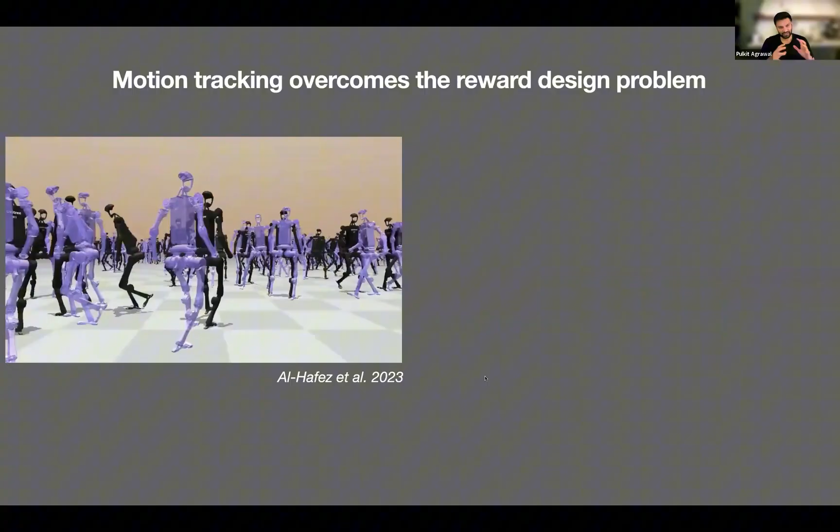So typically, training humanoids is much more involved. It requires a lot more work in designing the reward function and setting up the environments. So what people have been doing is relying on motion tracking. So over here, what you see is this purple humanoid or the purple target, which the black humanoid has to match. And these humanoids are being trained to do motion imitation. And this is how state-of-the-art humanoid systems today, for example, this video from Unitree, is powered.

So on the surface, this looks great, that there is so much we can do if we were to track positions and let humanoids follow these positions. But let's take a reality check. When we actually put these robots in the real world, and I think one question you might ask yourself is, why are there all these humanoid videos where there are no humans around, humanoids just in isolation?

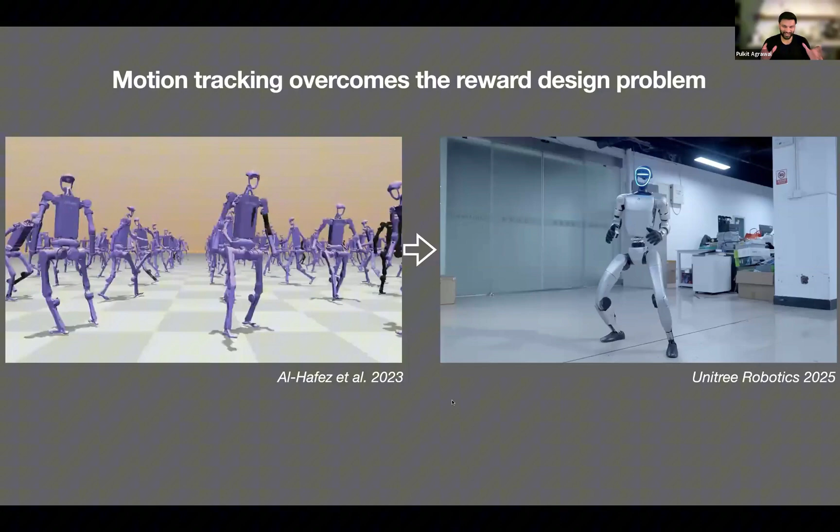And one of the big things is whether these humanoids are able to deal with the contacts that they're making with the world. For example, if the motion target is to spread your hands, as a human, if you hit an obstacle, you'll be fine. Nothing bad is going to happen. But for a humanoid, if it does that, it struggles.

Right? Here's another example where there's a motion reference to go lift something and come up. It's lifting something which is probably a bit thin. But when you give something much thicker to lift, this humanoid really becomes unstable. And the reason why these things are happening is because the humanoid has been trained really to follow the exact positions. It doesn't know what to do when there's a contact which is being made with the environment.

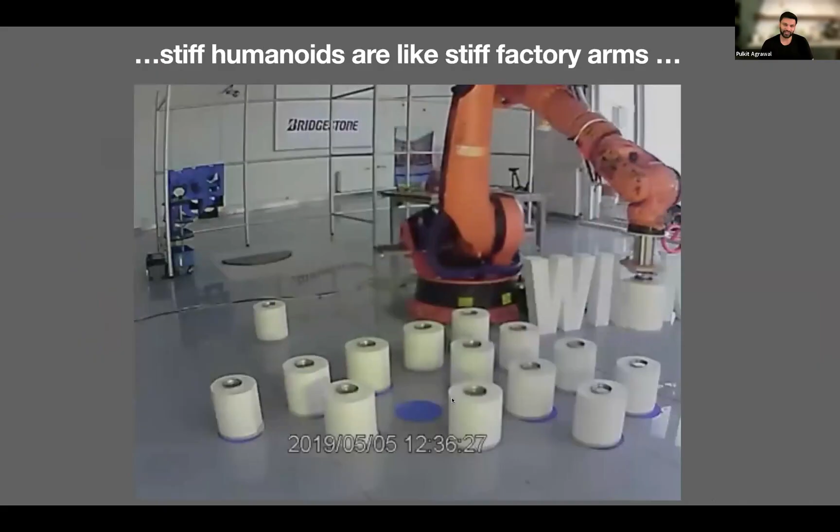So in some ways, we are training these robots like stiff factory arms. We really want them to follow a sequence of positions. And this position following is a very, very vision-centric view of looking at robots. Now, the real world or the physical world is physical because of forces, F = ma. And that's what we want these robots to be aware of: how do they apply forces in the real world, and not just in what position they should move.

So what we did in this work, SoftMimic, is to let robots learn how to apply forces and how to react to forces. So what you find is these robots can be very compliant, so they can deviate quite a lot from their motion references, really thinking in terms of forces instead of thinking in terms of positions, and taking the motion reference more as a reference instead of literally trying to copy it, right? And this is work done by Gabe and Michelle in our lab.

So here are some illustrations of what happens when you have a reference motion, but you have something which is super stiff, versus something which is much more force aware. It adapts to this new scenario. Here's another example, where the robot is bending, but in the process of bending, if it encounters a box, it will become unstable, versus a robot which is force aware doesn't end up doing this.

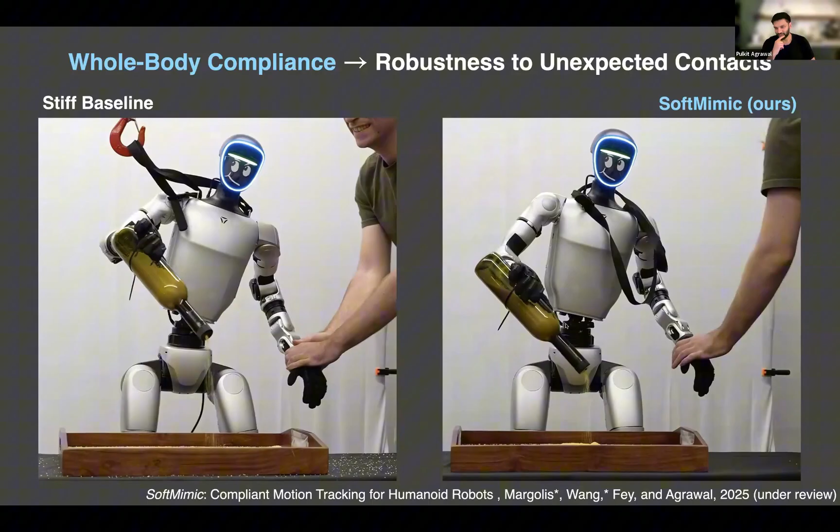Here's one more illustration where the robot is pouring something from a bottle. And if you shake it, the robot also suffers. Versus when the robot is thinking in terms of forces, things are different. Even though we are disturbing one part of the body, the other part of the body keeps on doing the same action. It's almost unaffected by what's happening on the other side.

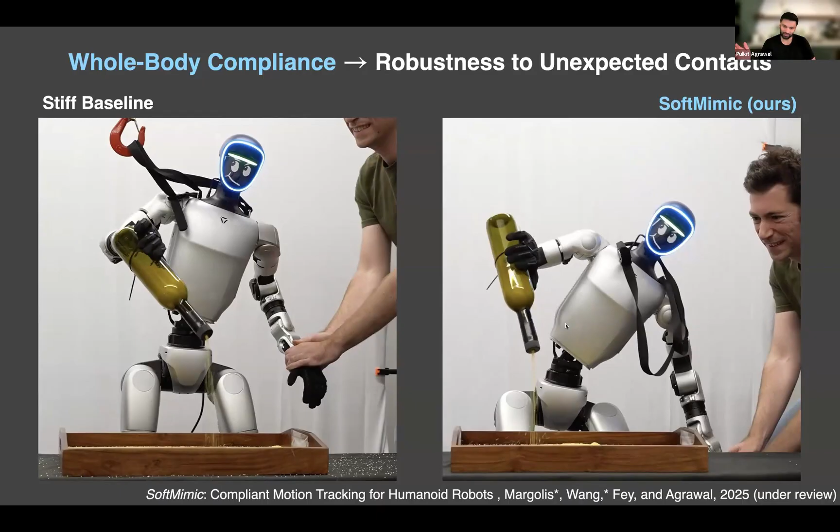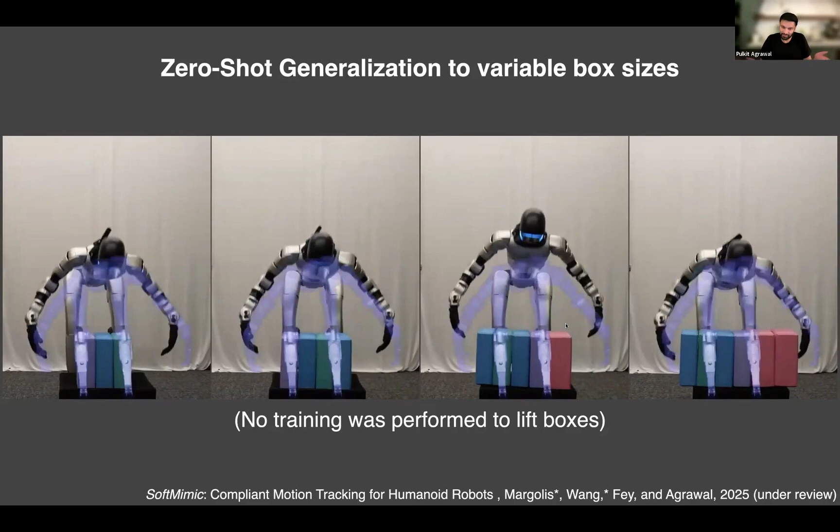Similarly, we can take a single motion reference and we can really give the robot these many different size boxes without requiring any training. And this robot is able to comply and pick up these boxes of different sizes. And this is again happening because it's thinking in terms of forces and not positions. It's not trying to match the position of a motion reference. It's not trying to necessarily detect where exactly the box is. It's trying to figure out, hey, where do I apply force? If I see force resistance, then it means that I have touched the object. I should just lift it up.

Here is another example where we train the robot only to walk in free space, and then without doing any additional training, we can apply an additional load. For example, putting something heavy on a chair, and there was no training done or no domain randomization done to enable the robot to deal with this scenario, or when a human is interacting with a robot, right? The robot again complies very naturally because it's been trained to think in terms of forces, or to act in terms of forces instead of positions.

Right? So the one thing which I want to communicate is I do think a lot of current robotic systems are built with this idea of position intelligence, where the robot control is about going to a particular set of positions.

And this is really deeply rooted in the idea that we want to do visual motor control, where we take vision as input and try to output positions. But I think to interact in the physical world, what we are learning from everything that we have seen in quadrupeds and humanoids and legged robots is that we should really be thinking in terms of sensing forces and applying forces, because forces is the language of physical interactions.

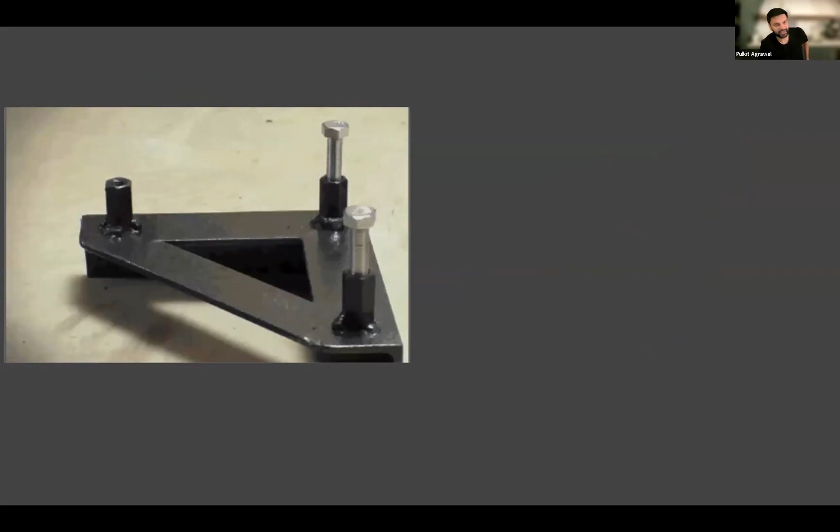Now, why would you care about force intelligence and manipulation? So here's an example. Suppose we want a robot to go in and put in a screw in the slot shown on the top left. Now, if you're thinking in terms of positions, what you would do is you would try to get a screw, align it perfectly to where the screw goes in, and then try to move the hand down.

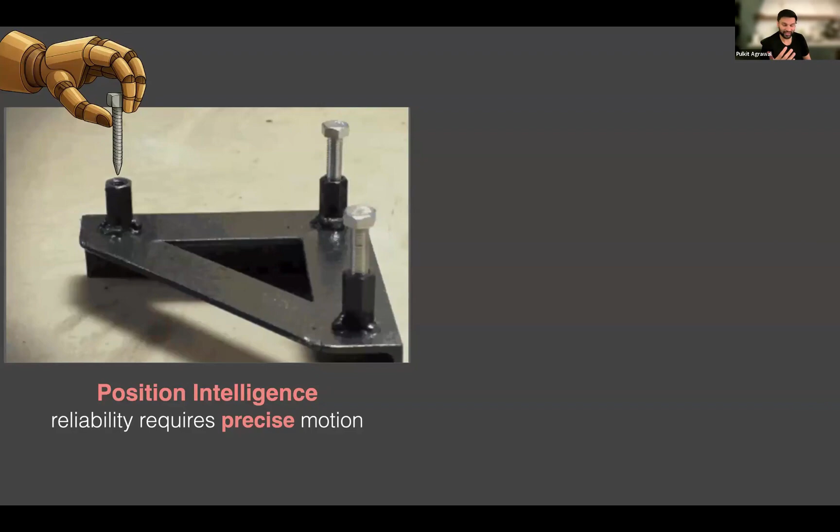Now, think about this, right? If you really want your neural network to predict at a millimeter level, sub-millimeter level, this will require tons and tons of training data. We all know scaling laws in machine learning, which say that to reduce the error linearly, you need exponentially more data. So this is going to be very expensive and hard to do.

Versus if you look at what a human is doing, the human is doing nothing which looks like position intelligence, right? It hits the boundary, it reacts to the boundary, the screw movement is quite clumsy, yet you're very reliable at performing the task, right? So force intelligence can help you get reliability without really being precise. And I do think this is something very powerful. And it scales with how machine learning scales. You don't require exponential amounts of data to be able to perform these tasks as a human. So what if robots could also start doing this?

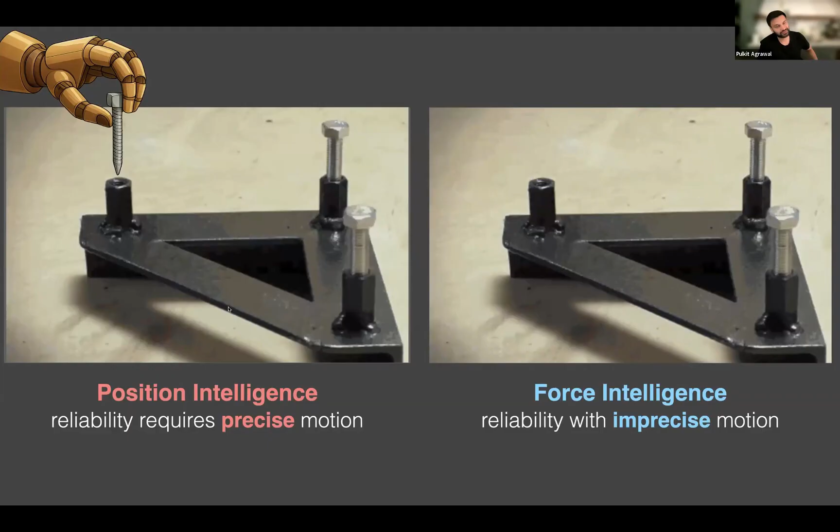So why is this harder to do in manipulation than it is to do in locomotion? And really, it all boils down to the fact that a humanoid or a legged robot is running on Earth, and Earth doesn't move. It's really, really heavy compared to the weight or the inertia of the legged robot. But once it comes down to manipulation, things are quite different. The hand is typically much heavier as opposed to the object. So if the hand makes a small mistake, the object is going to fly out, right? Just because the object is so much lighter than the hand. And this ends up really being the core problem, right?

And to illustrate this, I like this visualization where imagine if you had to move a chair or if you had to move a strawberry and then you had a truck to move it. What's going to happen? It's going to be really hard to control it. And this is really what's happening in manipulation today. We're using very, very heavy hands to control things which are very, very light, right? And the question which really comes down is, can we make these hands lighter? If we can, then things are going to be different.

But then if you try to make hands lighter, you might say, hey, I can use motors which are lighter. But then light motors also have less power, and that really creates a problem. So what do we do? So the one thing that we have been exploring is, how do you make the system be light? One thing is, well, let me not have so many motors to begin with. So why don't we minimize the number of degrees of freedom, right?

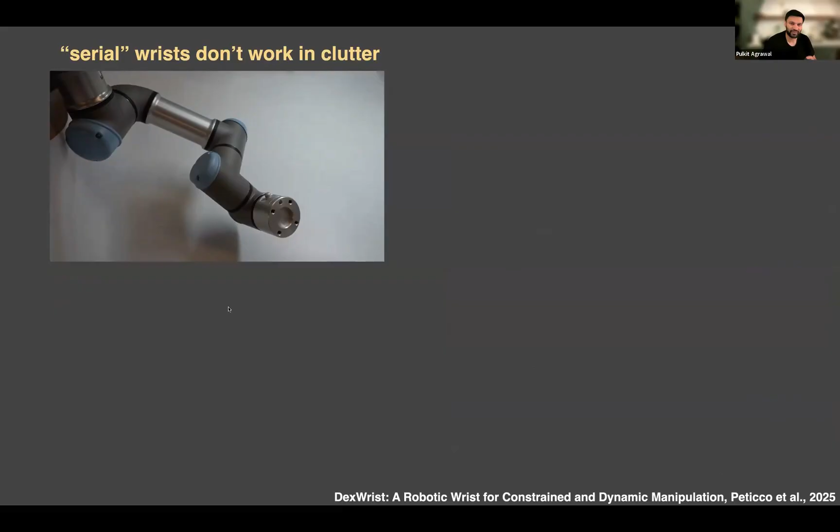I have more slides showing this quantitatively. If you're interested, I'd highly recommend reading this paper. But in interest of time, the main takeaway is that a two DOF wrist and a simple gripper can be very powerful. But if you look at the wrists we have in robotics today, they're not that good. There's a UR arm, you can look at the Franka and many other arms - even to make a small motion, these robots have to move so much. This is because these wrists don't have joints which are co-located, but joints which come in a series. Further, these wrists are also really, really stiff.

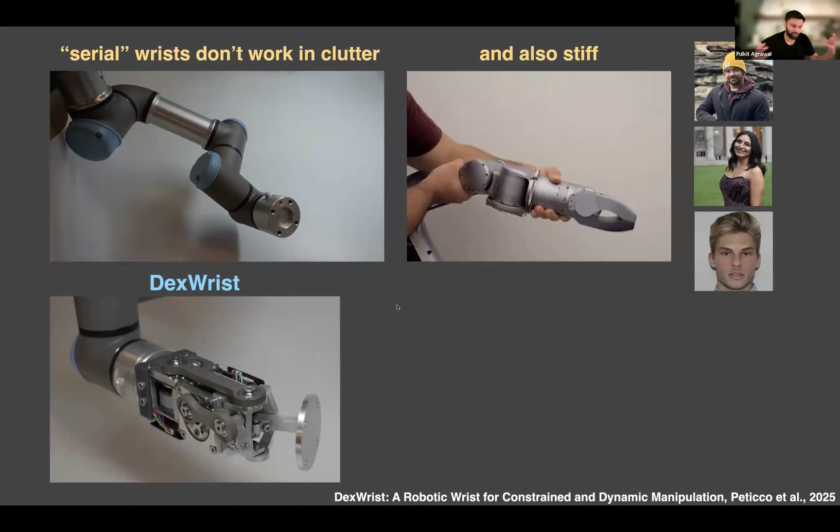So what some students in the lab did is they made this thing DexWrist. DexWrist has joints located at a single location, which means it can move much more easily in clutter. It's also built to react to applied forces, and it can move quite fast.

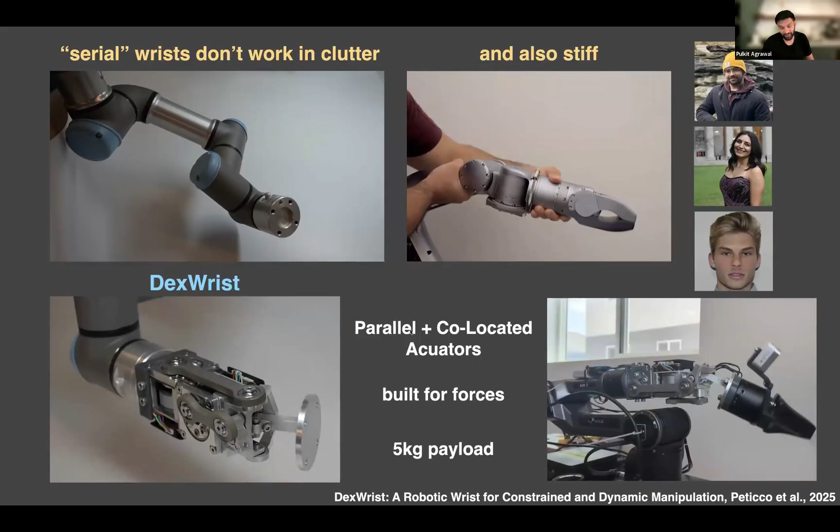As an example of the DexWrist, showing how dynamic it can be - this is a pre-programmed behavior.

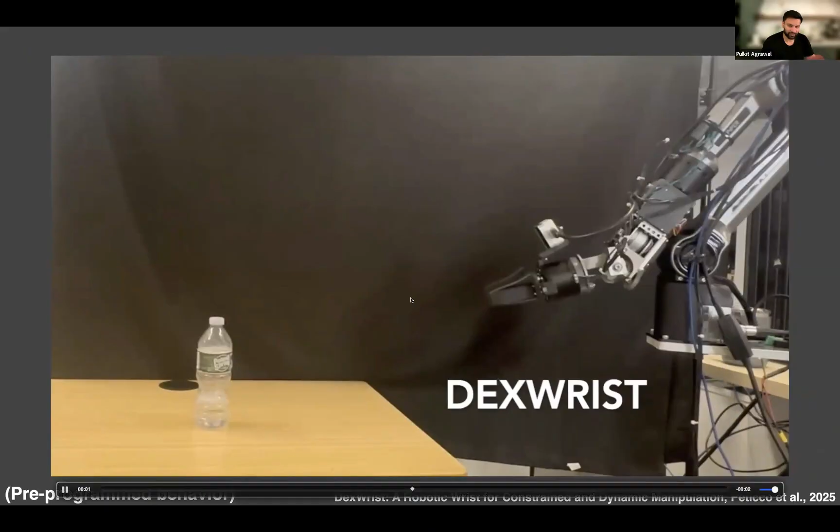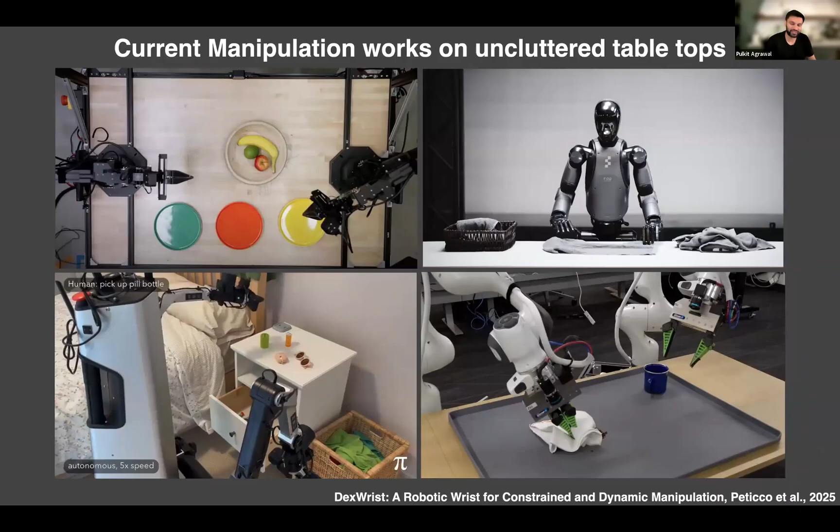The other thing you might have seen is that a lot of manipulation videos today are happening on really uncluttered tabletops with a few objects. Our households look very different from this.

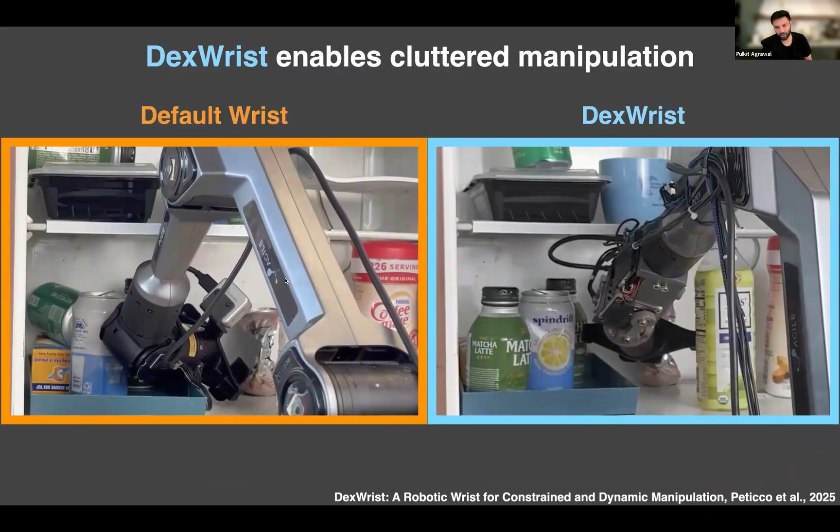Here is a comparison between what a default wrist and the dex wrist does. Default wrist on the left in orange, dex wrist on the right. What you find is, because of this parallel joint issue, the dexterous wrist can go into really small spaces and bring out this crushed piece of a drink, versus if you don't have a parallel wrist, you can't really go into these cluttered spaces.

Here's again a comparison doing wiping - by having this force compliant wrist, you can do things like wiping much faster. You get some generalization for free as the person is really moving this whiteboard while the wrist is wiping.

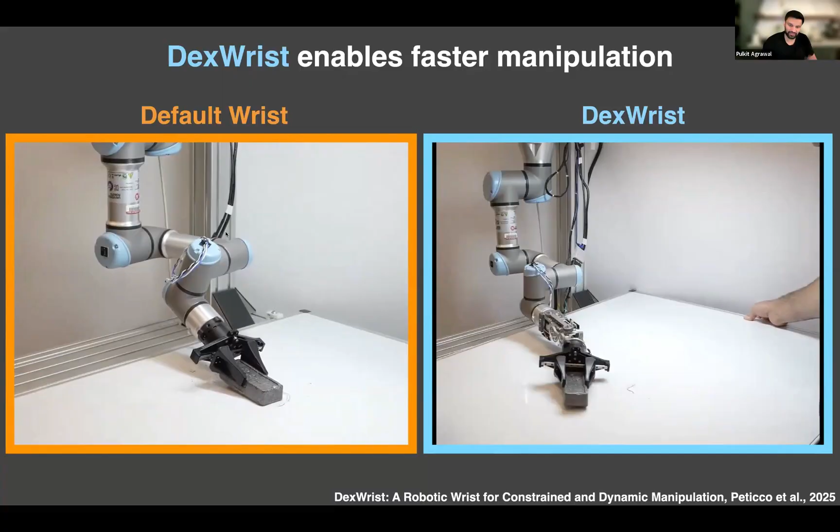What we also found is, if you use the wrist, the length of your trajectories is much shorter because you can move much more easily. So if you're collecting data, you can collect much more data. If you're doing learning, the advantage of shorter trajectories is it also increases your success rate, because now you need to plan or output fewer actions, which is always good for machine learning.

So the first thing we can try is to be minimal, trying to reduce the inertia of the overall system. What I showed you is that the wrist does this successfully. It's something which just improves machine learning for free, and it also allows robots to function in constrained environments.

But if you really want to do more delicate things and still be fast, I think you want to be minimal, but not too minimal. This is where we have been exploring how to construct robotic hands which are force aware, really applying this philosophy of force intelligence.

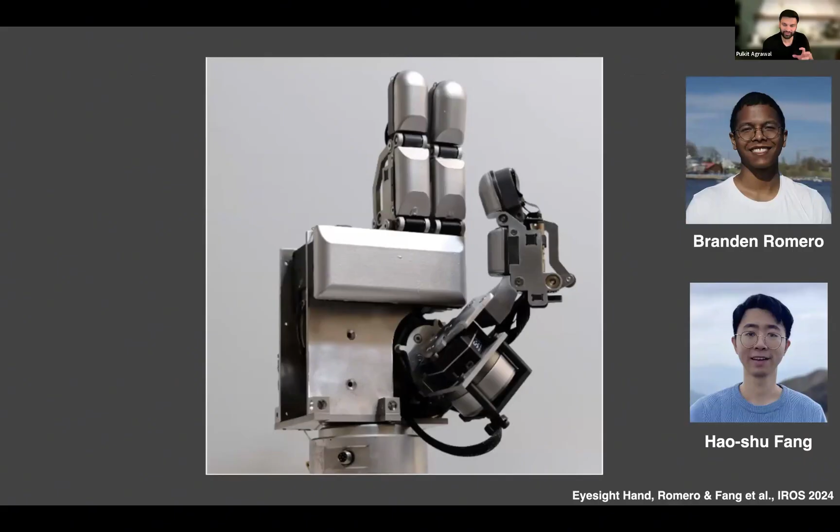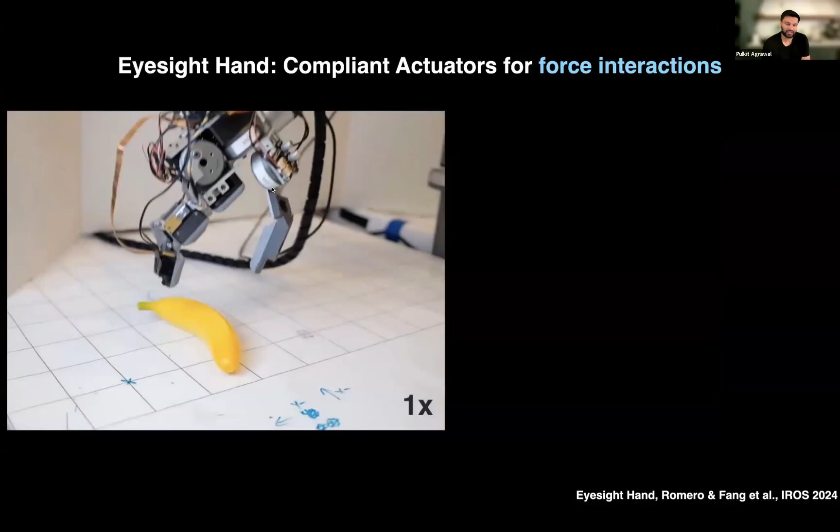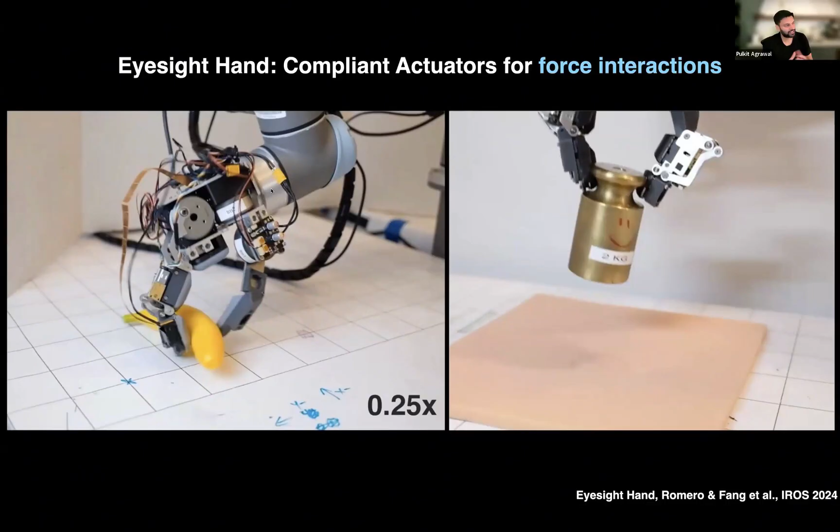This is work done by Branden and Hao Shu. This is our eyesight hand. This hand is quite fast. It's built for dealing with contacts with the world, while still retaining enough power so that it can lift regular day-to-day things. Some humans can do pull-ups with two fingers - that's amazing, that's crazy, but we really don't need robots to do all of that.

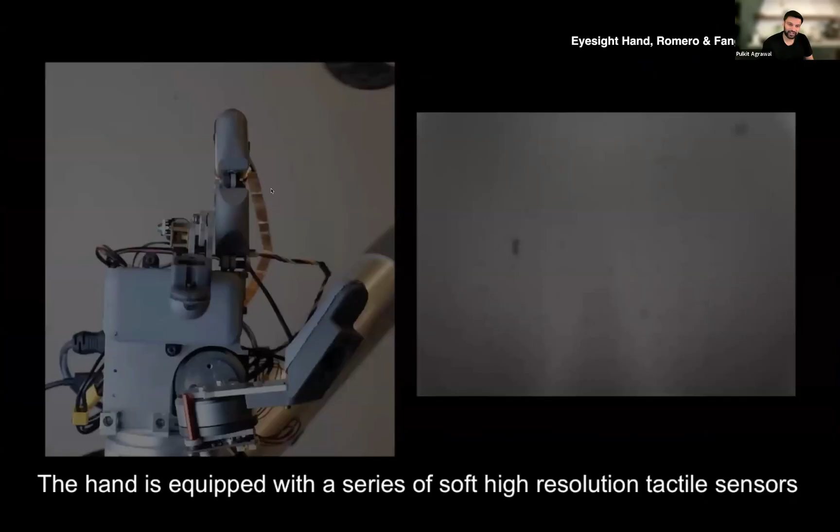These hands are covered in GelSight sensors, so they are capable of doing fine grained tactile sensing. I'm going to skip this in interest of time.

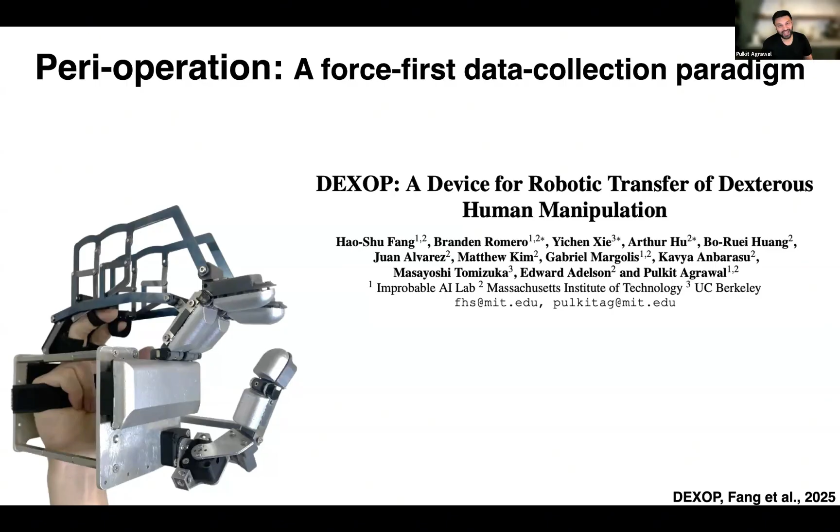Next, what we did was take this eyesight hand and convert it into a device called DEXOP, which enables humans to control this multi-fingered hand so you can go and collect data, but really in a force-centric mechanism. What I mean is, if you're doing teleop, you almost never get force feedback to control the robot. Here, because there are linkages mechanically connecting the human fingers and the robot fingers, the human gets force feedback, at least at the joint level, as it is interacting with the physical world.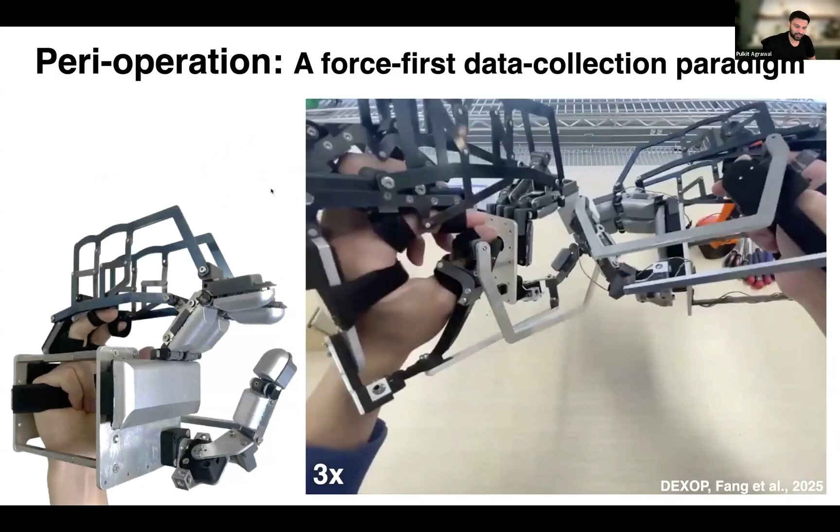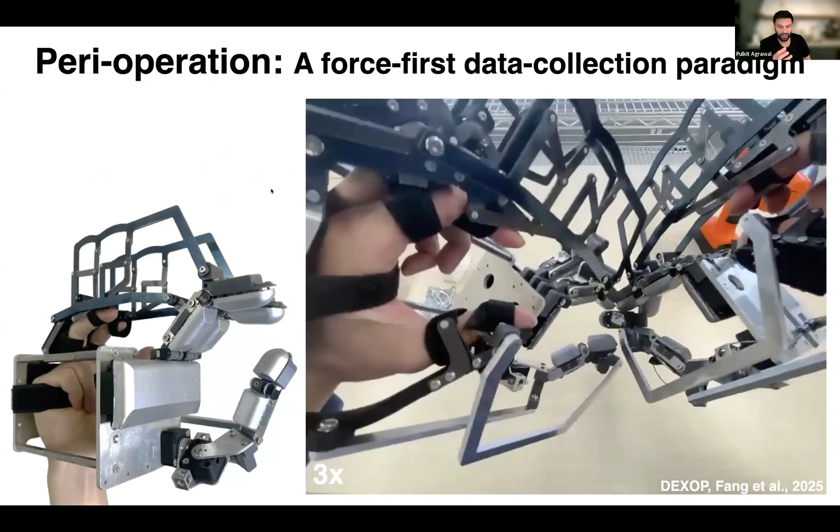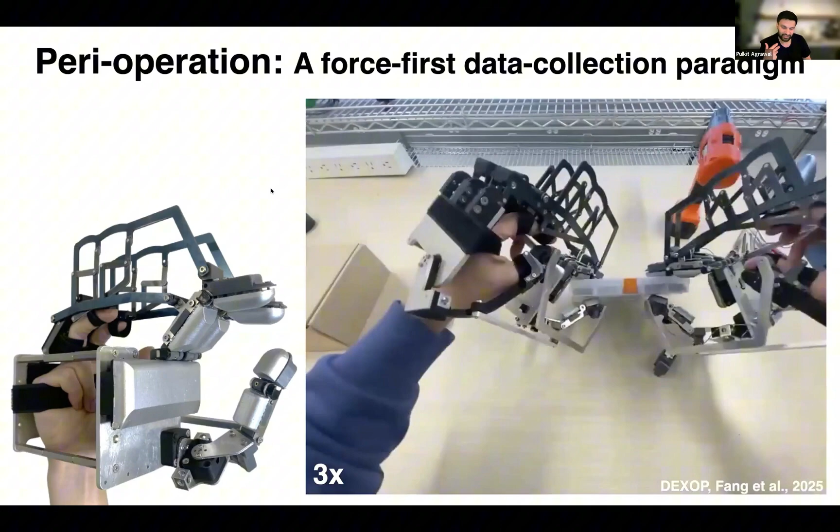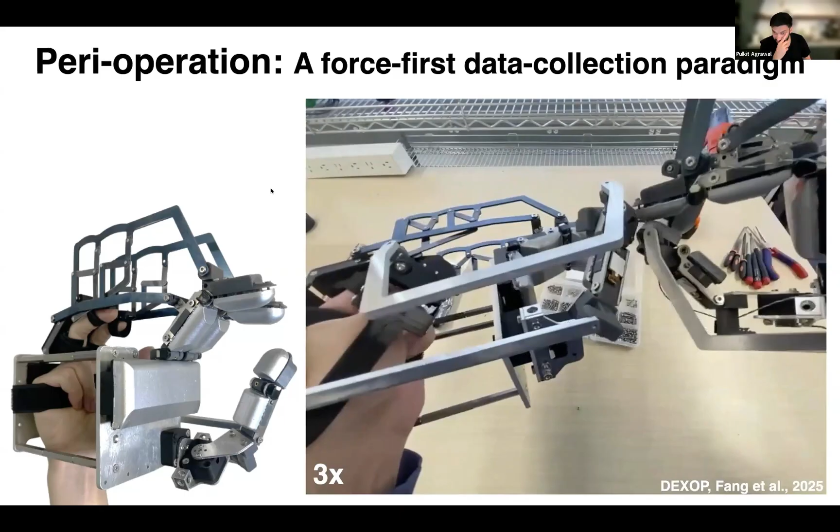The hand is covered in tactile sensing, so we can record that data. We can also record the joint positions. This is illustrating Dexop in action, where we are performing an assembly task. Over here, we are trying to assemble the hand itself. This illustrates the kind of things one could do with Dexop while recording not just vision, but also all the force interactions happening as the hand performs this assembly task, which involves manipulating really small objects, like this screw, and using tools with a single hand because the other hand is already holding something.

This is how learning with Dexop looks like. We're calling this paradigm peri-operation, instead of teleoperation. Peri means something close, and our interpretation is that because it's close, we can transmit forces, we can feel forces, and that's the benefit that comes from being close.

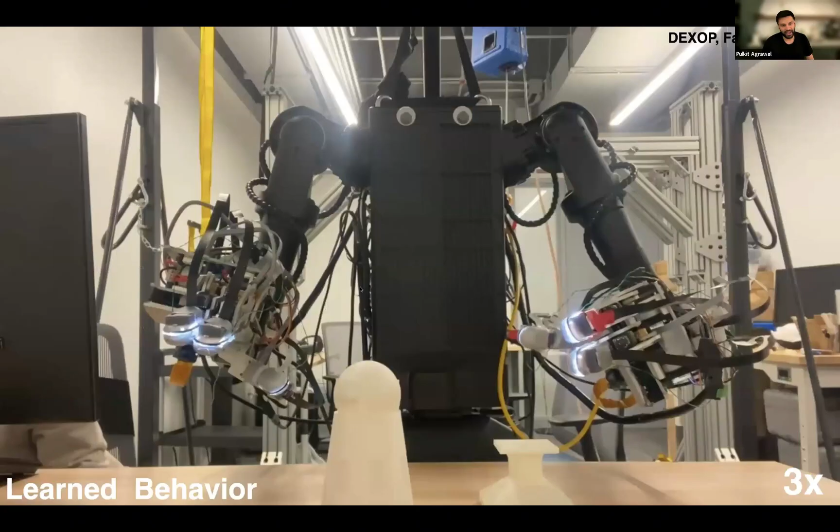As a demonstration, we can record vision and tactile data, and then go and learn a policy which can perform these assembly tasks, as you see in this video. So the data we're collecting is in a force-centric way, very amenable to learning policies.

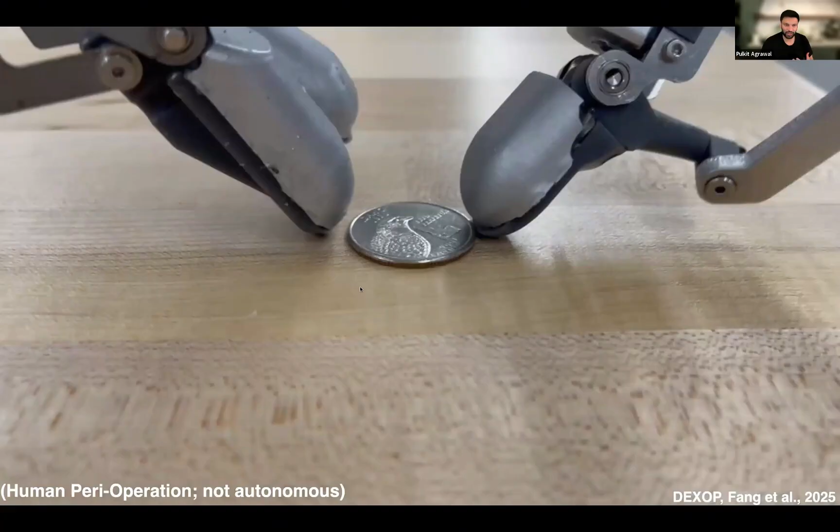Now these are some examples which are not autonomous, but just showcasing the design choices we've made, which allow us to do delicate manipulation, manipulate thin objects, orient objects in hand, use tools with a single hand because many times the second hand or third hand is occupied, and finally going and doing very fine steps of an assembly process.

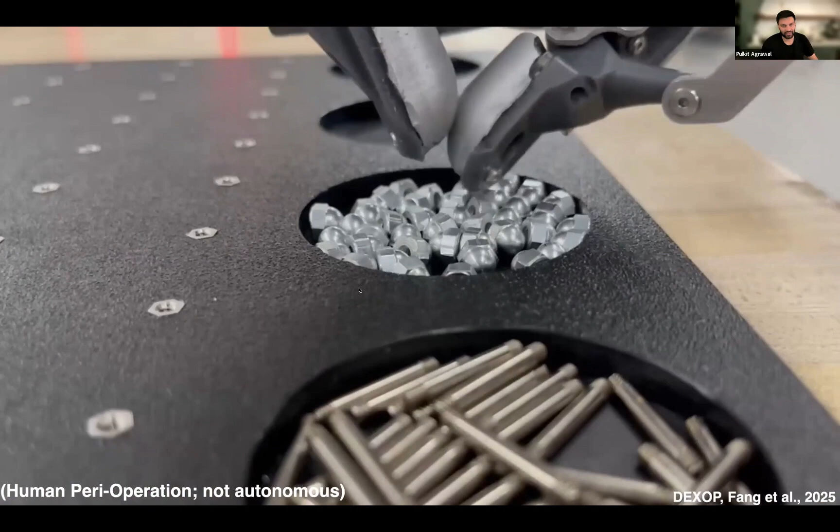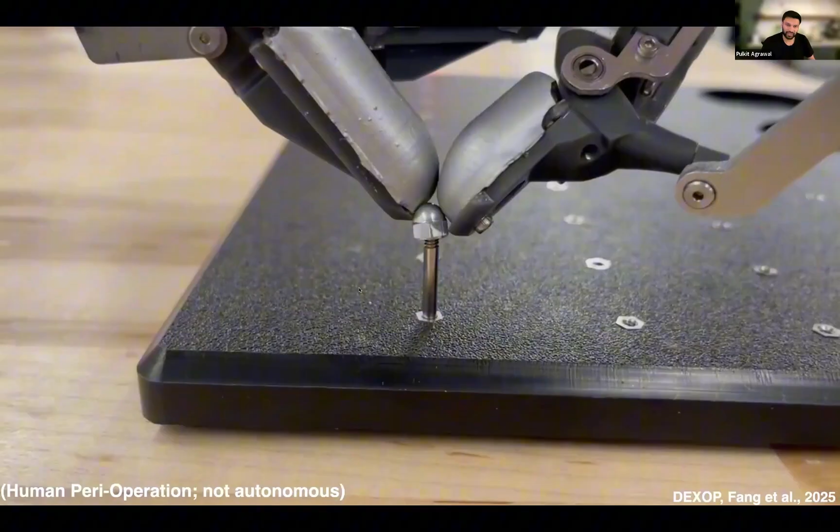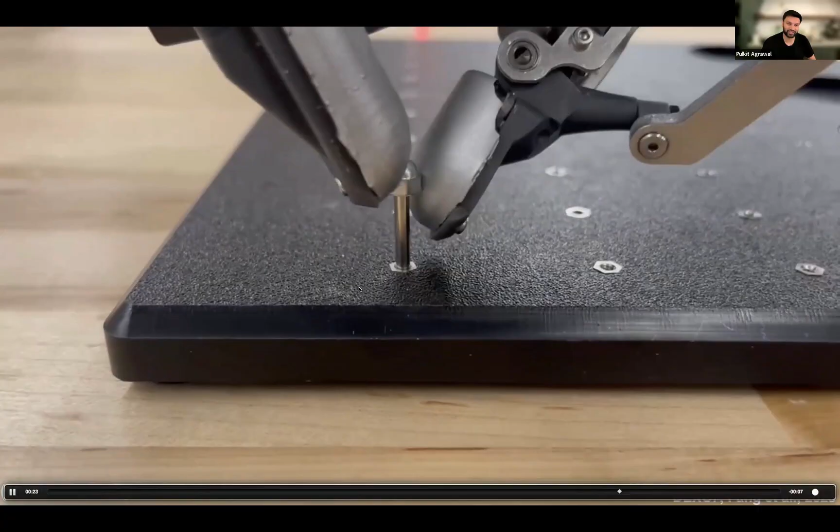So here is the hand picking up an M2 screw, really the smallest screw you can find, again showcasing what you can do if you're getting force feedback, both during data collection, but also hopefully when these policies are learned. Now, all of this was to say that now that we have good hardware, you can do peri-operation to collect data in the real world.

But if we want to go and scale up the interactive learning paradigm, we can take these hands and try to marry them with the power which comes from training in simulation. While we haven't yet done that, I'll give a shout out to some previous work showing how we can train policies in simulation to reorient objects to a target orientation, shown in the top right, and then deploy these policies in the real world.

Here's another example of the hand reorienting a new object it has never seen before. These demos by no means are perfect — the robot fails half the time — but it's really showing that these things are possible and can be scaled up.

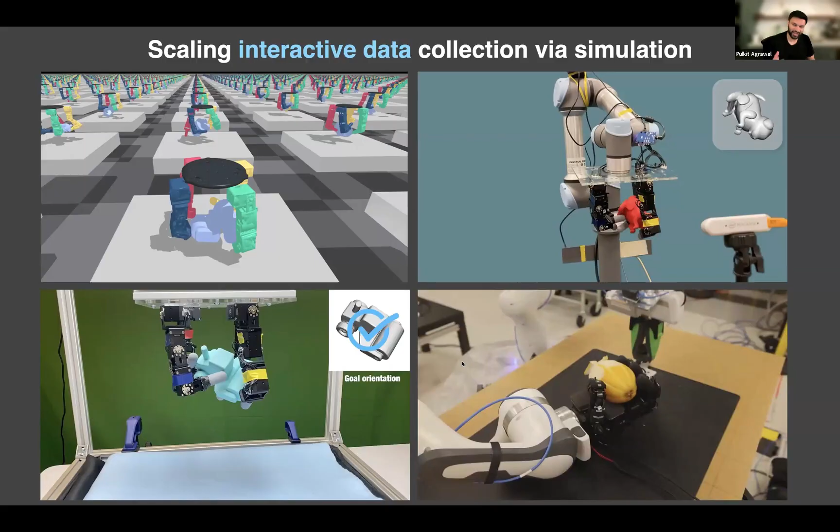And here's another example of peeling a vegetable, where all of this reorientation is essentially happening without vision. The hand can rotate these different vegetables, and when the second arm comes and peels it, you still have to resist all of these forces to ensure the squash never really flies out. This was work done by Tao Chen.